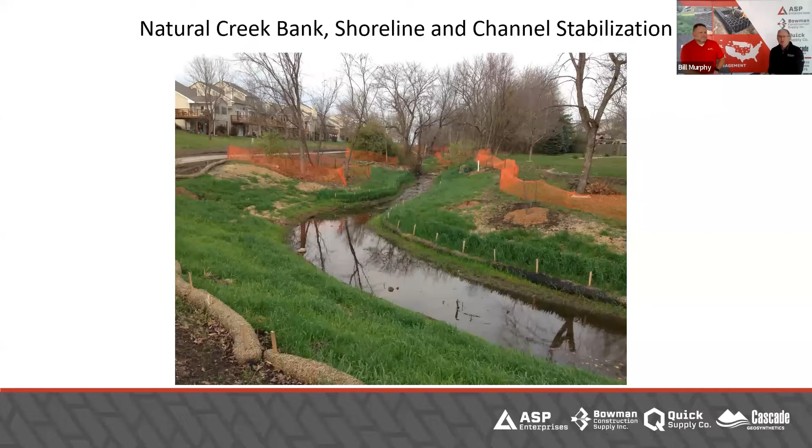So streambank stabilization, whatever you want to call it. It really runs the gamut, and many of you have probably dealt with some of this, but we're going to start at kind of the fundamental level, and that's biodegradable stuff, right? So here you see coir logs. This is a good example. We've got a temporary erosion blanket. Now, albeit it's a coconut blanket, so 3 years lifespan. It's got a coir log at it. We'll talk a little bit more about those, but that's 3 to 5 years.

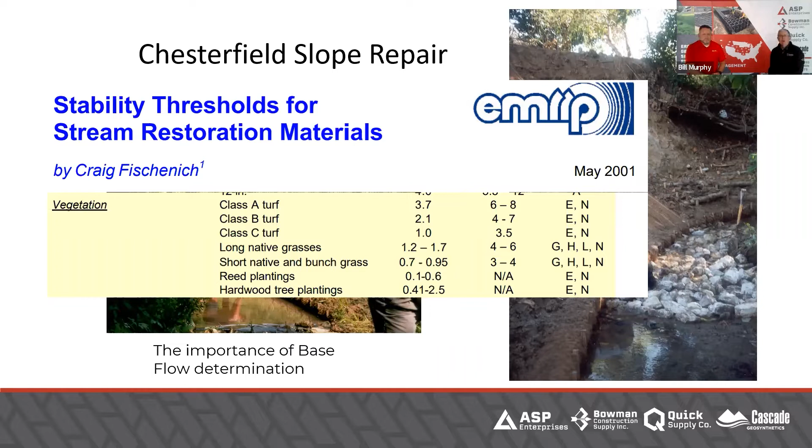But at the end of the deal, vegetation by itself is going to overtake the erosion control responsibility. And vegetation is what we're looking for, right? So we also need to understand vegetation has its limits. And so obviously turf is pretty strong. Those are shear stress and velocity ratings. And this is something that is continuing to evolve, especially with these deep root vegetation, what they're capable of. But we just have to understand that these are some of our limits for this type of creek bank where we're just trying to use coir logs.

And we can help you select that. Oh, absolutely. Yes. And that's what we're here for.

Even to the idea of contour wattling, you think of wattling, you think of straw, but we use contour wattling with coir logs because again, it's going to last way longer than the straw. It allows time for vegetation to have a spot to get vegetated within. It's going to do some stormwater management by slowing the water down, picking up sediment as it heads down to the creek, which is always a good thing. But again, it's just another example of coir logs and how they're applied.

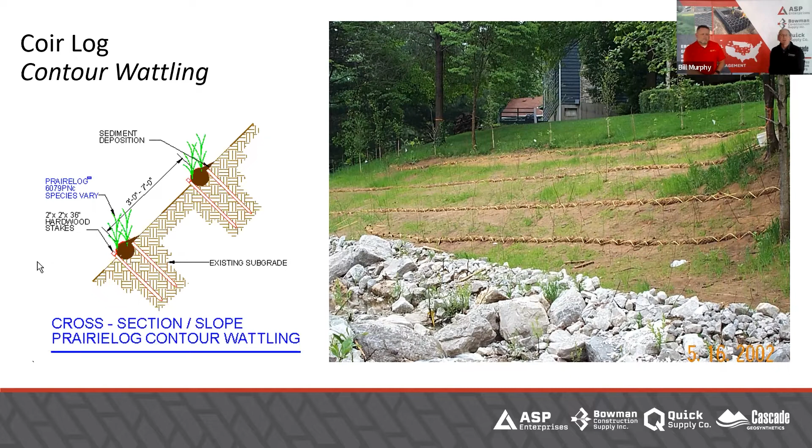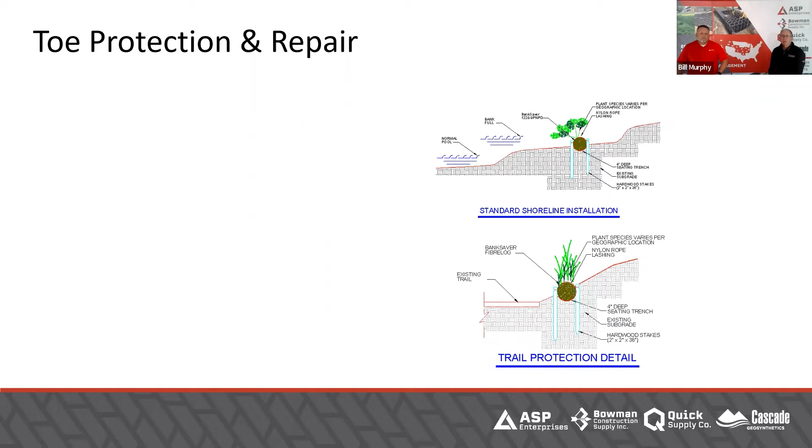Here's another one that's more common, for the toe, like you saw in the first picture, or in a bench. Again, the idea is giving it some vegetative support. And then typically this is an example. This is actually an old picture. Look at that, 2002. But the idea was this creek's coming down there and was eroding a lot of the underneath of these trees. And what this coir log will actually do is allow for sediment to build up behind it, and that sediment then helps that tree keep alive and healthy.

And so again, there's just a variety of ways you can use coir logs. And then this coir log itself is a growing medium, so plants will grow within it. And just like any other erosion control, you always want to think about the termination points, right? This termination point is at the end of it. And basically you just always want to turn the ends in, so if you have scour behind it, it doesn't undermine your solution.

And this is where I talked earlier on our practice run. This is a plan view looking down on top of the stream. Some people might look at that and think it's a profile where you're trying to key that in down below, but you're not. You're doing that with stone. The rock will be toed in.

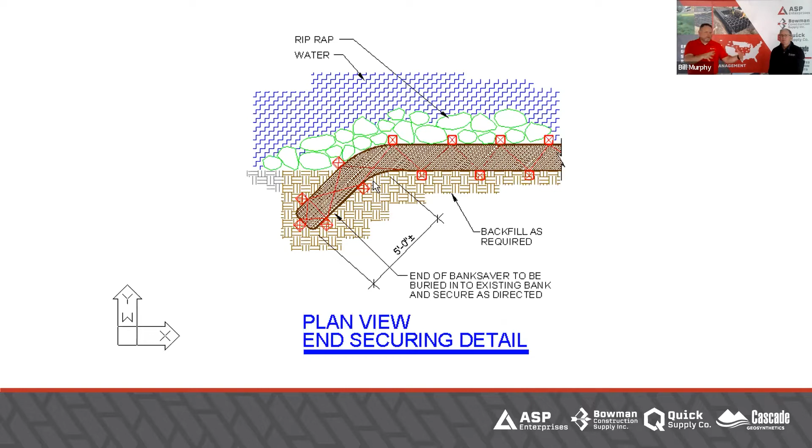So Biosol. Oh, I would love to talk about Biosol. That's one of our in-house. Can I have that? You can. Thanks. Or may I?

Rocky Mountain Bioproducts. Biosol is the nutrient source to establish vegetation. What Don was showing there earlier, and I just want to back up a step. What we're talking about today with streambank stabilization is some of the lighter, easier stuff, the lighter flows, easier channels, but we're going to progress all the way through to streambank and riverbank protection and how all these products work in harmony. So by the end, you'll hear us talk quite a bit about composite solutions.

For the vegetated solutions, we have to give that vegetation a chance. A lot of these projects have had a lot of soil disturbance. There's been a lot of grading activity. So you may not have good black dirt with organic material right at the top.

We've got to provide some nutrients. So in order to do that, we have Biosol and Biosol Forte, which are our long-term, we almost call them permanent nutrient sources to get that vegetation established.

Too many words on the screen. Years ago, Don and I said we're going to try to take text off the screen, but I left this slide in on purpose just to highlight that this is an organic fertilizer. This is plant-based. This is good for nature. This is not going to introduce any kind of leachates or pollutants or any contaminants into the water. This is all about water quality.

So establishing vegetation by promoting soil life or soil health, but also improving that water quality by not only having vegetation established, but making sure that we're not overdoing it with fertilizers. In the ag world, and I'm surrounded by corn and beans and livestock, often fertilizer is a dirty word. That's not what this is.

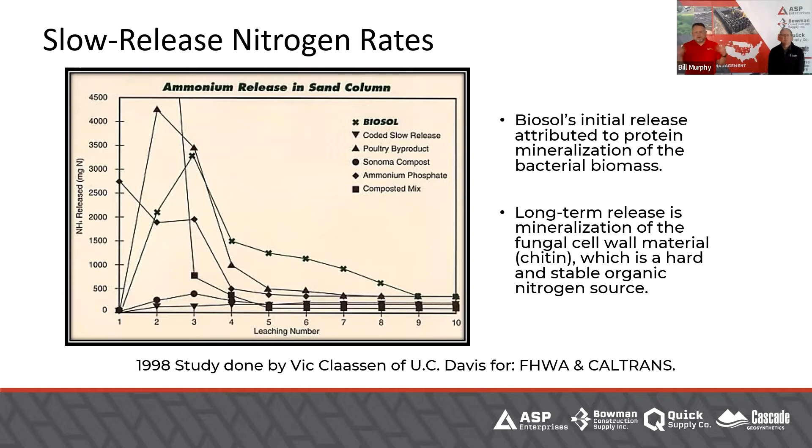This is one of two projects we'll show you here with before and afters. This is a 2-year difference. As you can see with the soil on the left, that's not really black organic material. That would have had a really hard time growing vegetation on its own. So to give it a boost, they added Biosol Forte, and you can see that that fed the soil, that feeds the plants, and you get not only the vegetation stand, but the water quality we've talked about.

This is a creek realignment project. Critical that that gets some vegetation, reinforced vegetation would be good on some of the steeper slopes, but you've got to make sure that for the larger storm events, the soil is protected.

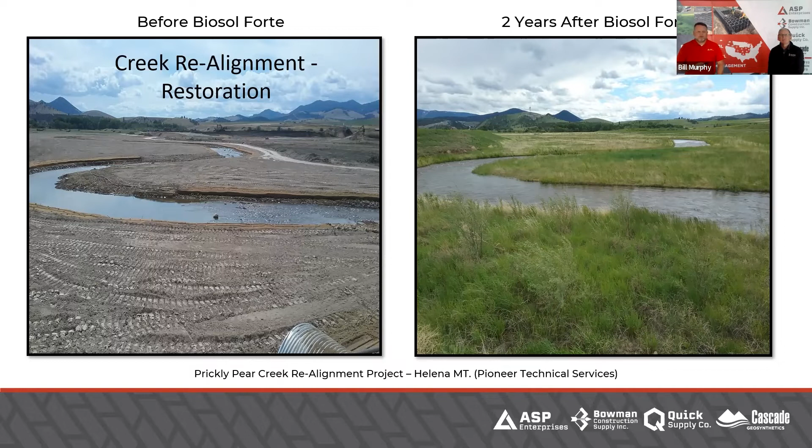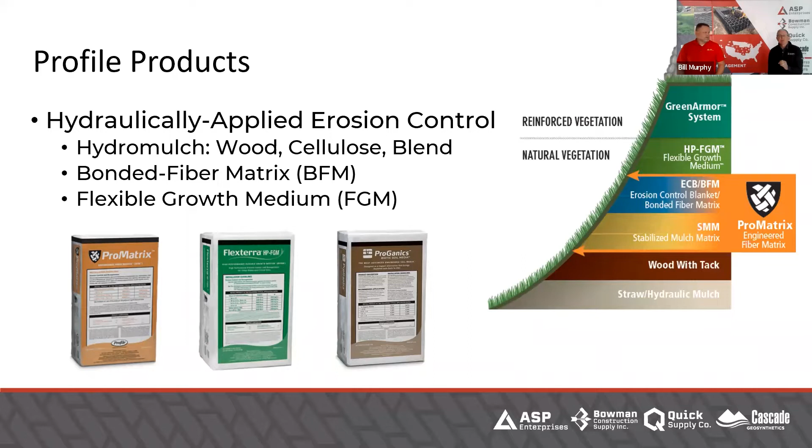And not only Biosol, which is a nutrient source, we talk about biotic soil amendments. Yeah, and so that's a whole other conversation, getting into Profile Products. We'll do that later. But ProGanics is just something that can benefit the soil structure because it's got organic matter, et cetera, but it still needs a nutrient source. That's the value of Biosol. And so ProGanics is a topsoil replacement. The biotic soil media is what they say, BSM. Yeah, right. And there it is.

So what it does, it helps build that revegetation platform. And it makes a more ideal growing environment. Again, it still needs a nutrient source. That's why you have Biosol. Yep. But it helps with that long-term vegetation. It holds all that material in place, basically. Which is huge for streambank stabilization. Yeah, it's got biochar, mycorrhiza, all kinds of stuff in it.

Yeah, I think I was going to keep talking about that. I don't know. I handed that over to you for this slide. Jumped the gun. That's okay.

So, again, we were talking about temporary stuff in the past, as far as the coconut blankets, the coir logs, et cetera. Now we're looking at turf reinforcement mats, having permanent root reinforcement or stem reinforcement that then has long-term implications for shear stress and water velocity.

This 3D image is awesome. This particular one is Green Armor. It's actually Enkamat, for the old folks who know what Enkamat is. It's a really open TRM, which is interesting because then a lot of the natives that might have a stiffer or a thicker stem coming out can get right through it. But then you basically glue it to the ground.

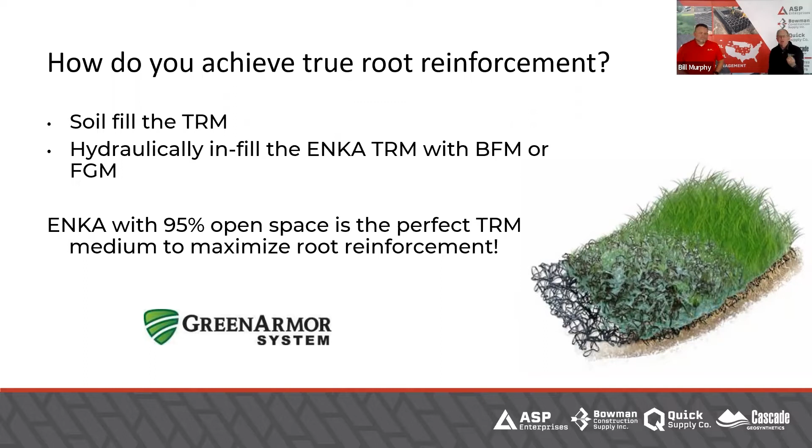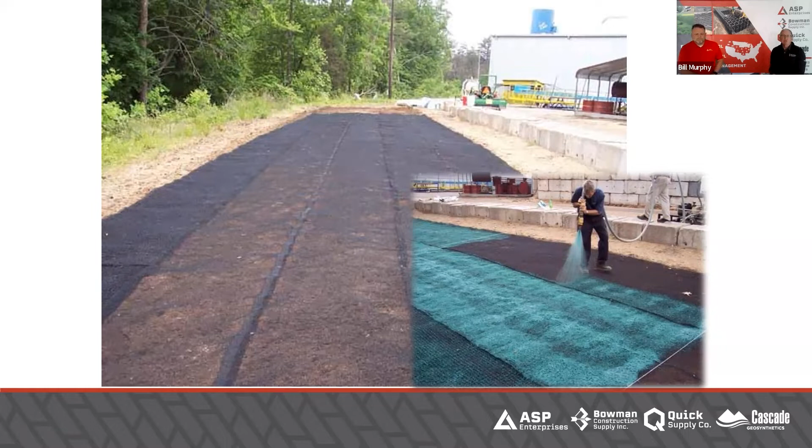It has staples in it, but you basically glue it to the ground with Flexterra. And you could even put ProGanics in before you did the Flexterra, which is hydraulically applied. Yeah, so it's hydraulically applied here, and you can imagine the strength of that when it's stapled to the ground and then glued to the ground.

And then what you need to know with Flexterra, which we're not going to get into today at all, but Flexterra is a great growing medium also, that it's going to allow for moisture to stay with that seed, and you'll get this kind of vegetation. Hugely popular. Oh yeah, big time. There you can see that root reinforcement.

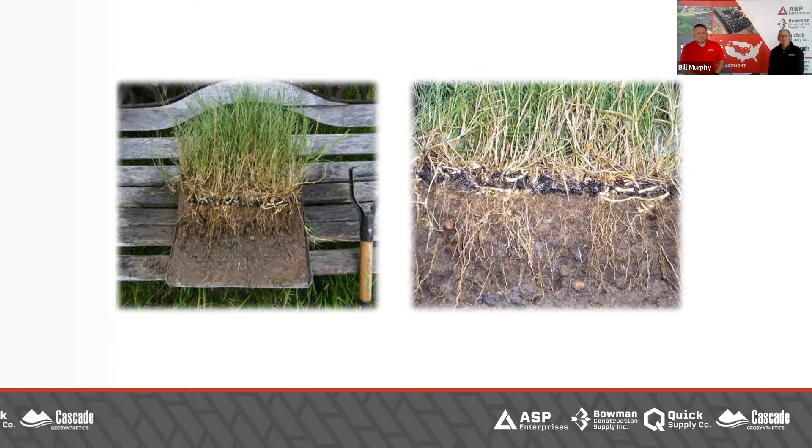You can imagine how much stronger that is in a hydraulic environment, because now you've got roots down deep that are going to do what you needed to do to hold that soil in place when you have a big stream event. And so go back to creek bank stabilization. Here you go. Beautiful.

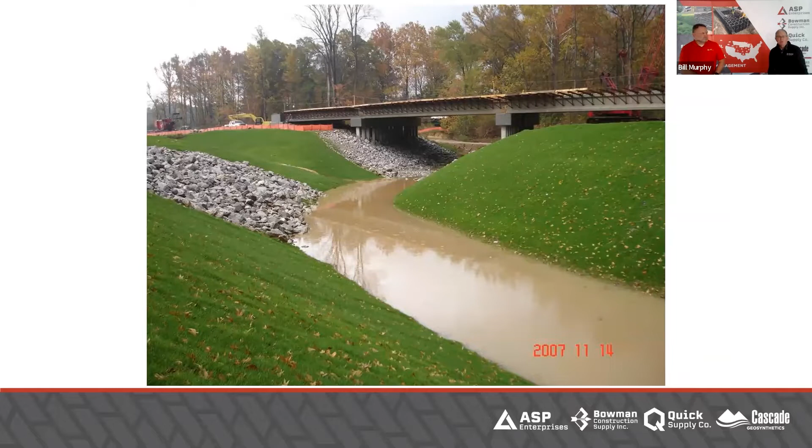Now here's an example. Having this on the bottom, this is still probably considered a drainage channel because we're going to grow grass in the bottom of this thing as well. But again, it's a great solution. When you look at the vegetation, they've got some rock in areas where they felt like they needed some more protection. But again, a very green solution that allows for sediment to be settled out of the water, filtered out of the water, et cetera. So that is one TRM.

And then we have North American Green that has the 3 TRMs we've talked about in the past. You got SC250, C350, P550. Yeah. We can also use those in a creek bank stabilization. Again, we're more concerned about plastics maybe, so we have to think about that. But it's still very effective to help get native plants in many cases established on a slope. And we'll show you some examples here.

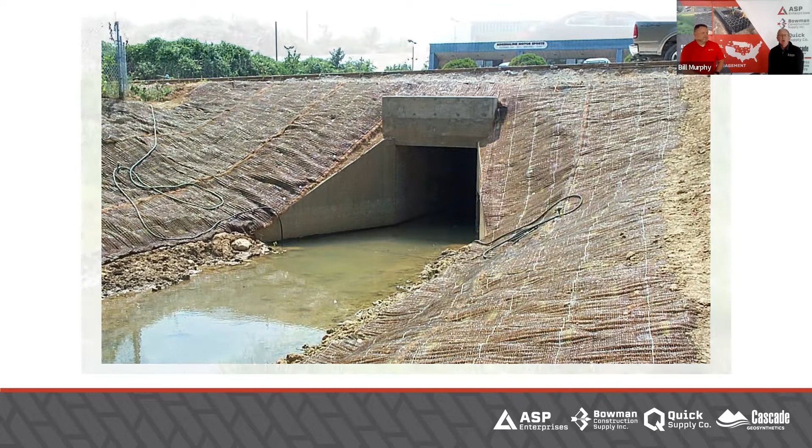This project was actually originally designed with riprap, and the contractor came to me and said, I can't get riprap to stay on this slope. Good. We decided to vegetate it. And so instead, again, this is kind of creek bank stabilization, but any of that scour that comes behind that culvert, we're protected with C350 in this particular case.

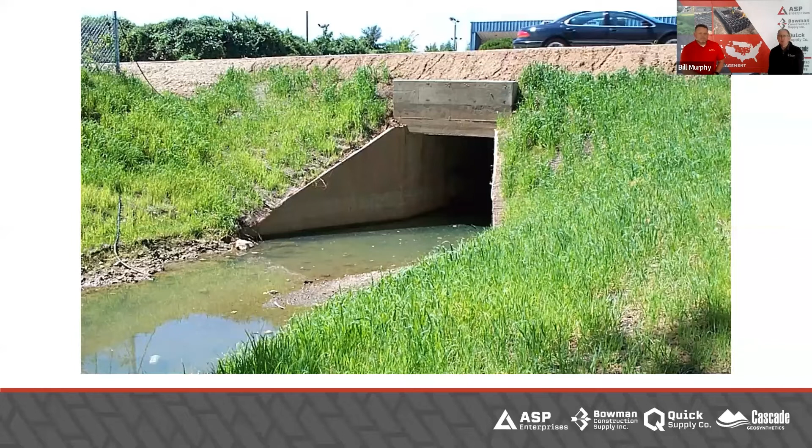Then once they got done with the C350, they transitioned to just an erosion blanket. So they got vegetation on the slope above it. And then in some cases, they even planted some sedge plants in it. Here you can see a further picture away. And now you can see a completed picture, there with the sedges. They actually planted those, cut it through the TRM. And then again, a very successful project.

How much nicer is this than having 6 feet wide of rock riprap that you're trying to walk on to get to the water's edge? No, thanks. Yeah, no, not at all.

Just a reminder that for these TRMs, especially North American Green's, these are the shear stress ratings, comparing them somewhat to riprap. You look and you say 30 inches of riprap is comparable to SC250. Even if you looked at 30 inches of riprap compared to P550, P550 is probably about half the cost of installing 30 inches of rock.

So there's some value in terms of the cost of it, but then also you got the vegetation advantages, all those other things. You can mow it if you want. You don't have to worry about debris catching in between the rocks. I mean, turf reinforcement mats offer a lot of benefits. Yes, big time, big time.

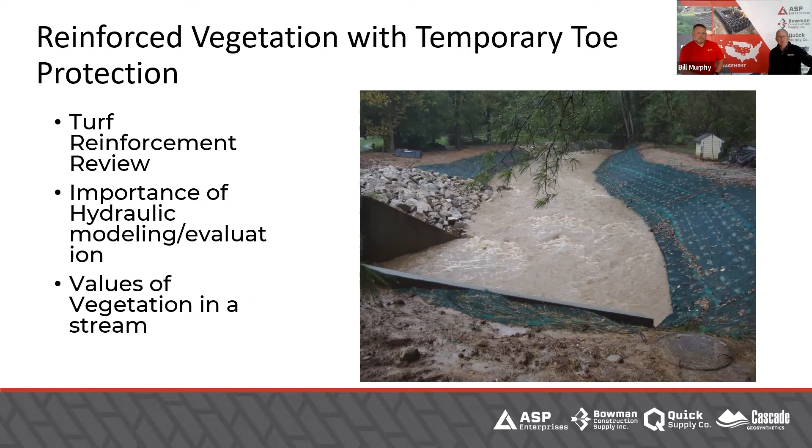Here's another creek bank stabilization. They put some rock on that downhill side where they were really concerned about scour. But again, you can see it's taken a pretty good volume of water. Looks like the day after they installed it almost. We've done a lot of this here.

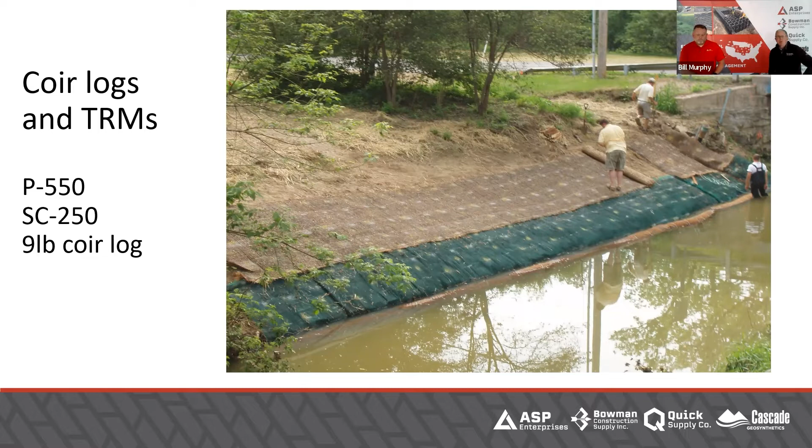This is actually a golf course, and it was in between 2 culverts. So we have a coir log down at the toe. You can barely see it. 1 layer of P550 where that shear stress is a little higher. And then up higher, we went to SC250.

Again, here gives kind of an after shot. Eventually, those coir logs will also completely vegetate just with natural seeds that come through, or you could actually live stake it, that kind of thing, if you want to do that up front.

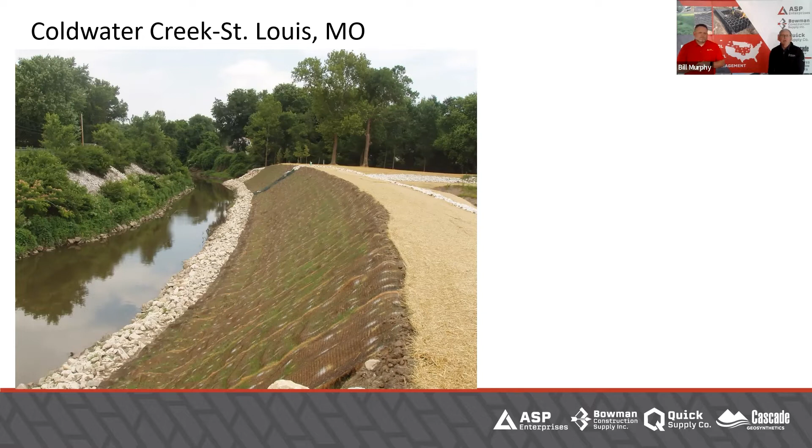This was an MSD project. Again, it was just a creek bank, C350. This is before they decided to use rock riprap for the toe. And here's the after. Again, good vegetation. That's going to be around for a very long time. The vegetation even protects the TRM from UV sensitivity, those kind of things.

It's a long-term solution. And then this is another one that was a nice channel project. They actually did both sides of the channel eventually. All native plants were planted in these. Did great. They probably could have picked a little different rock than just normal gravel. But again, a great project, great solution, because even the toes were protected.

And if the citizens go jogging by that or out walking around with their dogs, once that's fully vegetated, they don't even know it's reinforced. It's an all natural look. Yep. But you're providing the reinforcement it needs. Yeah, very good. Now this is a little different.

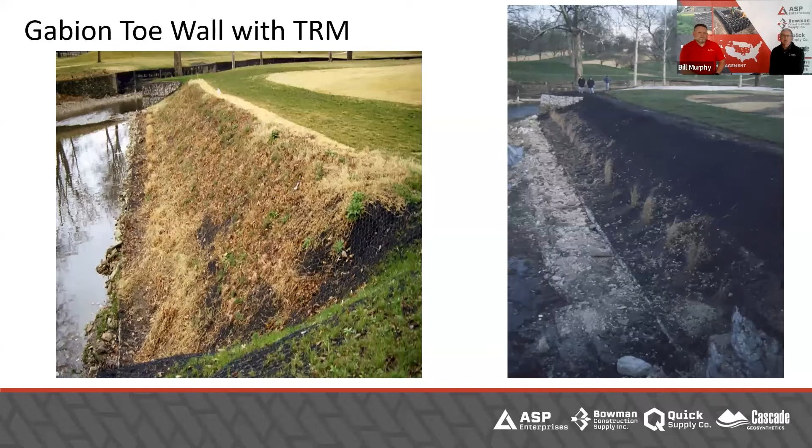And then here's another version of it, just looking from a distance. But again, another golf course. I believe this one was in Kansas City. But great project, and we started doing more of these with this Gabion toe, just to make sure the toe was established. And then we also talked a little bit in some of our stuff about bioengineering.

Bioengineering 20 years ago, we kind of said, well, it looks like it's twigs and sticks, which it is. And in many cases, that's been very successful. Conservation departments specifically have been very successful in taking willows that are dormant upstream and protecting a slope. The challenge, what we think we've come to, is that you need some structure even in bioengineering. Because if there's a $1 million building on the uphill side of that slope, we need to make sure there is no chance of failure. If it's a conservation area and they lose a little bit, they put it back together, no big deal.

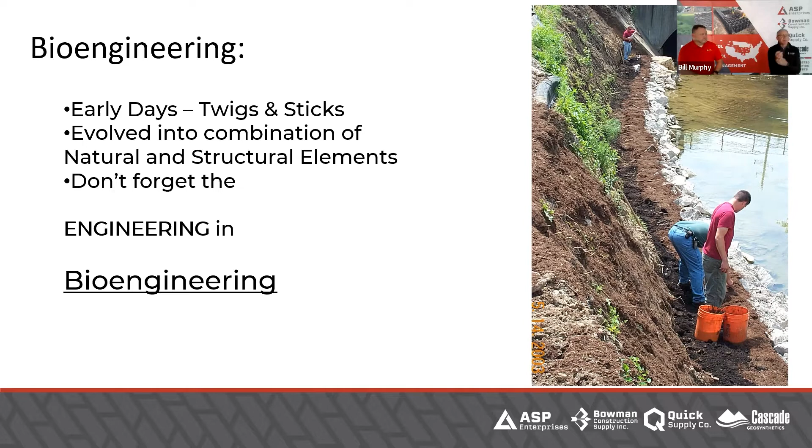So we're going to talk a little bit about bioengineering, but more about the structural elements. For example, here, this is the start of composite revetment, which we'll see some more of in a minute. Here's just some plain live staking. Again, we've got structure at the toe. We've got a good, strong TRM on the slope, and then they put a lot of live stakes in it. And I wish I had an after picture, because I've got to believe this thing is about 10 foot tall and you can't see anything. Again, it's going to be a very natural look, but very successful.

Here again is that composite revetment. Composite revetment has grid layers, basically like burrito wraps, that then have live stakes or bare roots in them to get that vegetation going. It also has some rock with it, but it is a structure, and it does then blend into the environment. So it ends up being a very environmental solution. I think we'll have a couple more images similar to that as we get into it later.

Yeah. What is that? And that's a live stake. So we have done a lot of live stakes over the years. We supply streambank projects with live stakes with bare roots. We can certainly give you recommendations on varieties that we've seen work well in the past. And again, it's just a great way to get something vegetated, and it can be fairly inexpensive because a live stake can be as cheap as $1. And in 2 years, it'll be a 4 foot tall plant. So a live stake can really be a good solution.

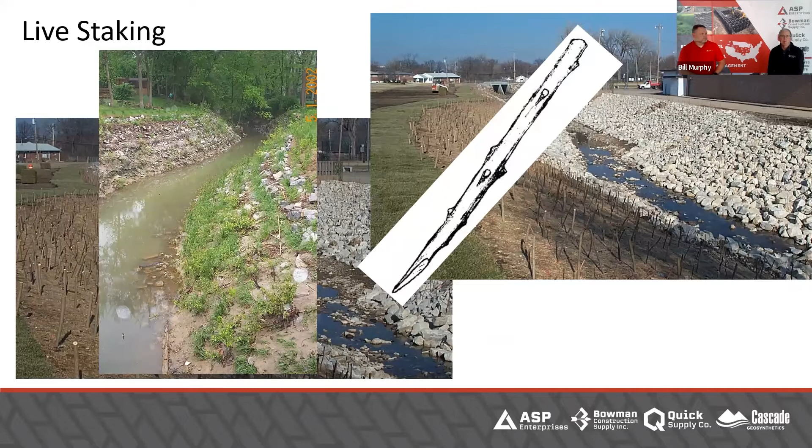So here's, yeah, I'll talk about it briefly. High performance turf reinforcement mats. Really what we're talking about is getting into some, and there's a question on there, I think, getting into some anchored systems to get into the higher velocities, higher shear stresses. We're going to keep getting stronger and protecting more critical areas as we go.

We have a number of products that are considered high performance turf reinforcement mats, and then a number of the DOTs, because we're talking about 12 states. I know you see a lot of Missouri projects on here. That's just the guys that sent us pictures of their projects and the ones that we've most recently talked about. But in all of our locations, the DOTs have their own categories for turf reinforcement mats. We can help you make the right selections for those.

Here's one example. We'll spend more time on this later. This happens to be ProPEX's Armor Max product. It's a really awesome solution that's anchored down and can take a lot higher velocities and shear stresses than most. And we have a full case study on this that's available on our website. And then we also have some of these imprinted literature, where you actually have handouts at some of our conferences like the IECA events, where we can have those available for your reading.

If you guys have a project where you're considering some different solutions and you want our help, that's one of the ways that we can help you convince stakeholders, is with a lot of our successful projects we've had in the past, help tell the story.

I'll go back. Well, no, go ahead. The question was about Biosol and its shelf life. As long as it stays dry, the shelf life is much longer than the year that you're talking about, because they bought it in the spring of '22. Can they use it in the spring of '23? Absolutely. It's basically until it hits the soil and those biotics start to go after it. It's basically not activated. There's no activation. So good question. Thanks for asking.

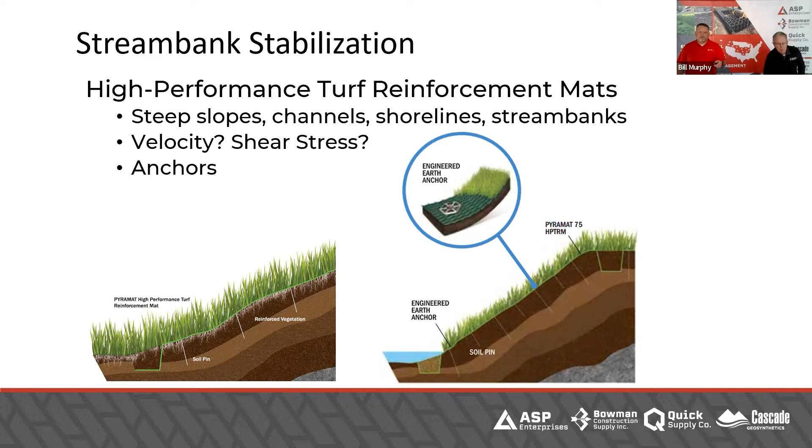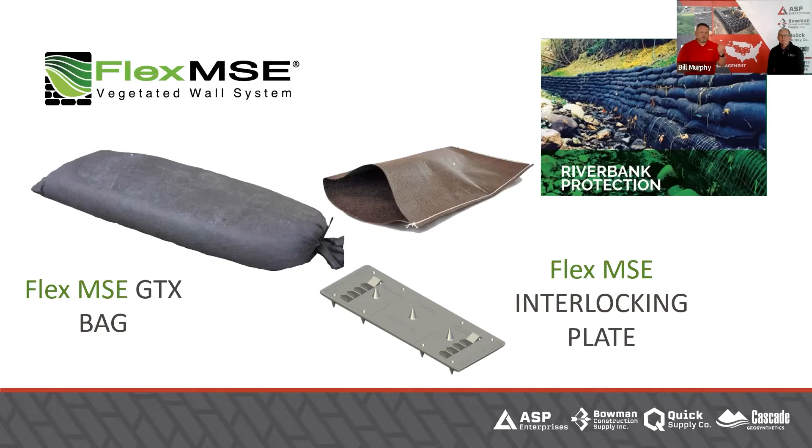We went past the HPTRM, spent a little bit of time. We'll get more into those later. But as we start to talk about structural solutions, we got to talk about our vegetated wall system from Flex MSE. These bags are filled with on-site material. These are non-woven geosynthetic. They can be filled on-site, or they can be filled off-site and trucked to the site, depending on what works best for you. These don't have to be installed with heavy equipment. We have one right out in front of this building that I built with some of our members from our warehouse by hand, really easy to assemble. Every bag, every plate, they all interlock together, and it makes quite a strong system, as you see in that upper right-hand side.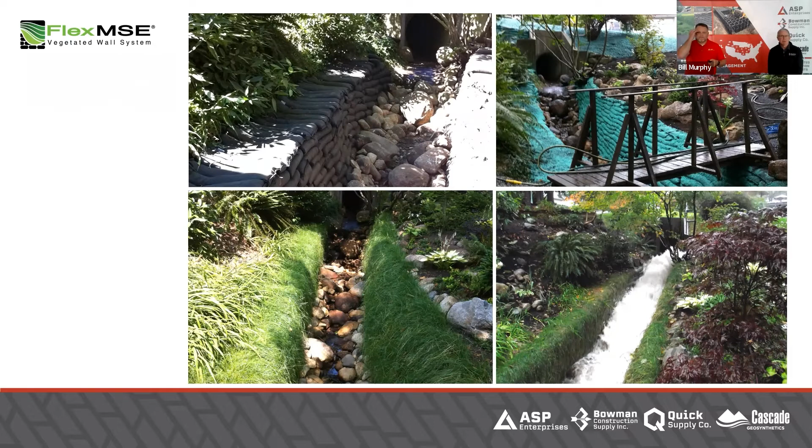And here's another example of that. They use natives here. And on this particular example, I think they cut into the bags and plugged into the bags themselves. They also have examples of layering the live stakes or the bare root seedlings back into the wall. FlexMSE has really good design software on their website.

You can access that through our ASP website, Quick Supply, Bowman, Cascade Geo, and there's a design tool in there, but they love to help. So there's a guy named Joel Kennedy who wants to come down and do lunch and learns with us. The owner Mike Calwert, they would love to do lunch and learn. So contact us if you want to learn more about FlexMSE.

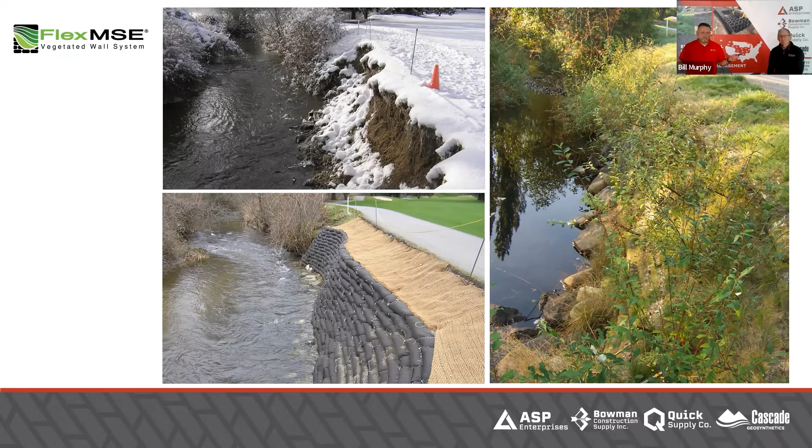Here's another project. Can it survive cold weather? Yeah. The original product was made in Canada. So they've got a ton of projects up north of the border in Canada and all throughout the US. And they're really popular in the UK and Australia. They're all over the world. They can handle all kinds of climates. And the whole goal here is to have a vegetated solution, as you see in the picture on the right, it looks all natural. Now, not all of our projects are going to be vegetated. We'll talk on that a little bit later too, with some of the solutions we have.

But people often ask if FlexMSE can handle really extreme wave action on lakeshore protection or in streams. It's not just the bags themselves that are there. They are tied back into the slope with GeoGrid, just as any MSE wall is. And those could be every 2 bags or every 3rd row and tied back with that GeoGrid, and they're all interlocked with the plates, which is patented. There's a hook that actually holds that plate from going out away from the GeoGrid, but it also ties hard to the GeoGrid to keep it up against the slope and makes all the bags interlock together. Once fully vegetated, you hardly know it's there.

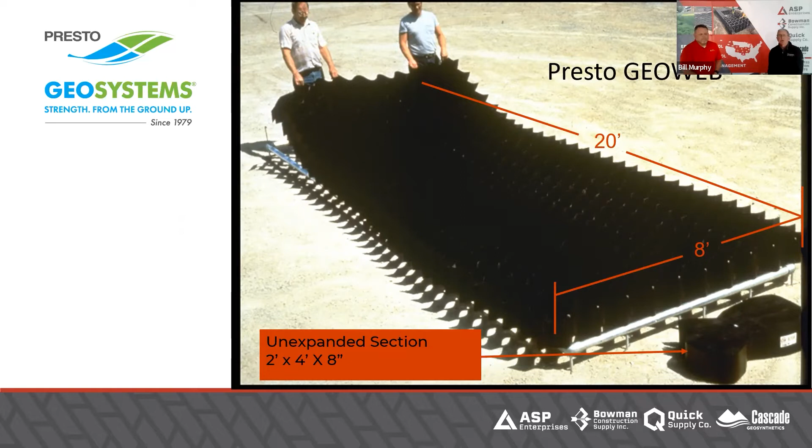GeoWeb. So you've heard GeoWeb maybe in the past. This does work for creek bank stabilization as well. It's HDPE panels that are welded together like you see here. And basically it's a way to put on a slope, protect the slope. A couple things, especially if you need to add some topsoil to it. One of the terrible things with a slope, how do you add topsoil and expect it to stay there, right? Yeah. GeoWeb's a great thing for that. Cellular confinement. Cellular confinement is important with rock because then we can maybe even use a smaller rock size, but it has more velocity strength because it's confined. And that's really one of the values here of GeoWeb.

In this, you can see here, now here they're actually putting soil on it. And they're probably going to put some kind of a TRM on, or some kind of blanket at least on top of it. But cellular confined topsoil is better than just topsoil by itself because it's just not going to flow down. That's a massive slope. And what was holding that together? What were those orange lines? Oh, they also have tendons in here. So those tendons, there's an ATRA clip that can go to that tendon, hold that whole GeoWeb down. It's just a good system.

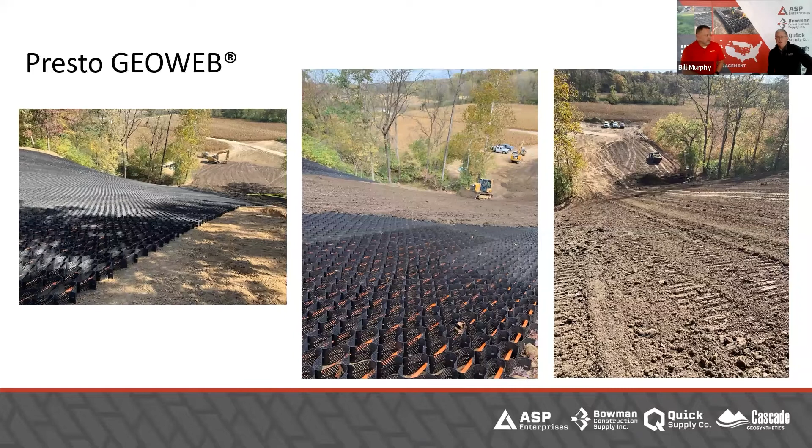And again, they're talking about websites. They have another one that they can do a project setup for you, give you recommendations, all those kinds of things. And they want to do lunch and learns, whether it be virtual or in person. Yep. Yeah, Presto's ready to help.

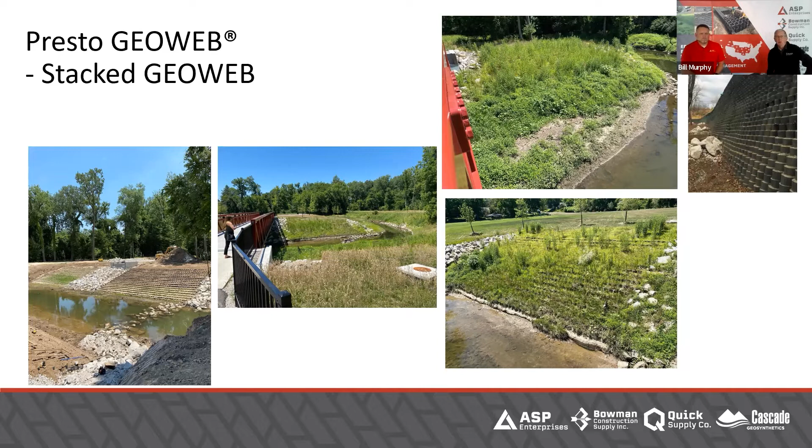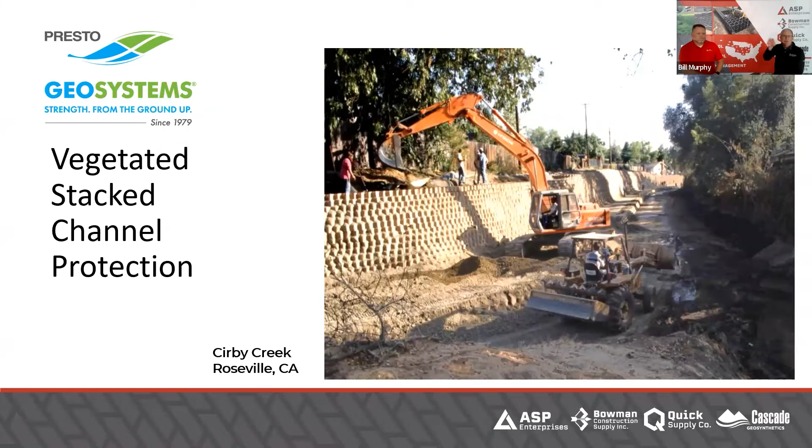Even if you wanted to, you could probably even spray with Flexterra. Here's again another example of that. Every one of those little pockets you see is a way to get something to grow in them. Here's another example where it can even do two-tiered and move one off to the side because again it's flexible. Typically we're using 3 or 4 cell panels wide, so that's kind of your tier, your tie back. But we also use GeoGrid to hold them back when we get really tall. More of an MSE wall. Yeah, yep. But again, look at the vegetation. That's awesome.

And then the last one in GeoWeb is they also have a system, and it's on their website, that you can use GeoWeb, and once you have the GeoWeb installed, then you fill it with soil. You can actually put a TRM on top of it. Now it's stronger than either the GeoWeb by itself or the TRM by itself. It's a great solution because now each of these pockets are basically little 1 square foot pockets of soil that can't go anywhere.

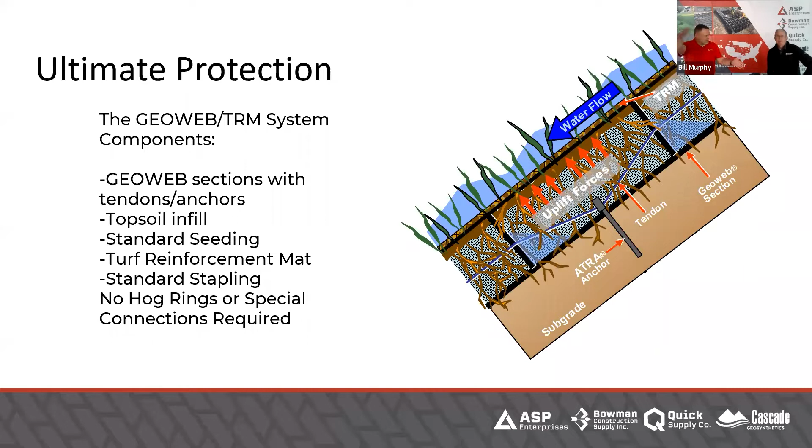Yeah, and that previous slide shows that ATRA anchor. This is part of the system that can be connected to the tendons. And then the ATRA key holds the cells open on each unit. It's awesome.

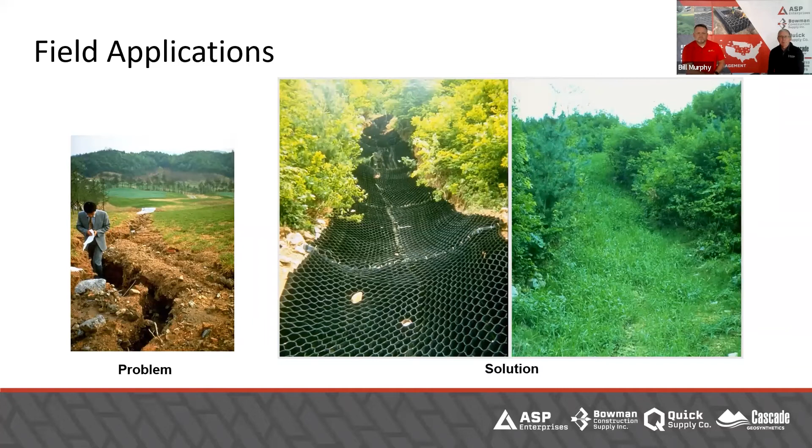Here, this was kind of a cool project. It wasn't really a creek bank. It was a very steep slope, and they weren't worried about it because they put a TRM on top of it. Look at that, fully vegetated. That's awesome. And then here's another ditch. So again, Presto does a great job of helping you with projects and getting you design materials. A lot of design support.

So transition mats, that's a category we created years ago through ASTM, and it's really grown in popularity. It's something between the turf reinforcement mats and some of the heavier structural reinforcement that we'll get into a little bit later. North American Green ShoreMax is one of the original transition mats. It's a rubber mat, so it's flexible, easily conforms to the surface. It can be anchored with staples, rebar, earth anchors. And the whole goal with this is trying to get vegetation to grow through it so you don't even see it.

And then we also have InstaTurf, which is ShearForce 10 and ShearForce 12 from our friend Tim Lancaster. ShearForce 10 is a rolled product, looks like AstroTurf, the artificial turf, but it allows vegetation to grow up through it. So you get the full vegetated protection eventually, but you get immediate protection day one, immediately green with that ShearForce 10.

ShearForce 12 is the panelized version. It sits on top of a rubber mat, similar to ShoreMax. And that gives you a little beefier transition at scour holes like outlets of culverts and some of the trickier transition areas. There's some hybrid solutions where Tim will recommend ShearForce 12 on the bottom and the toe and graduate up to the ShearForce 10. And from that, you can get into the turf reinforcement mats and erosion control blankets.

But all this stuff has been tested as well. All the InstaTurf stuff has been tested, and I think it was TRI. So they have shear stress ratings and velocity ratings.

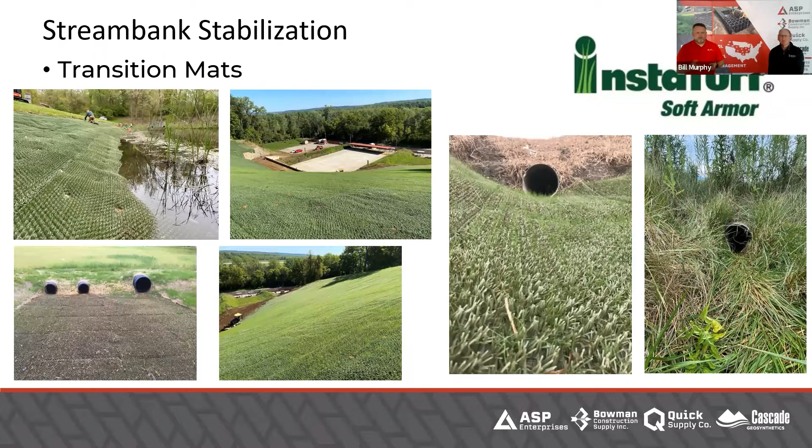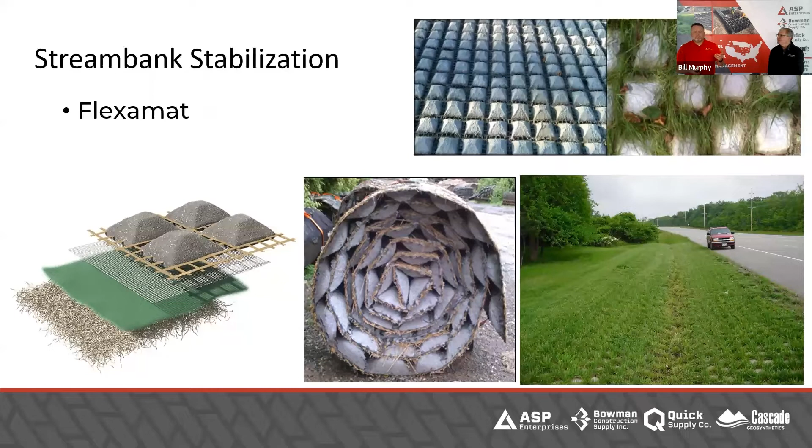It comes in various roll widths and lengths, and all of our sales team are really comfortable talking about Flexamat and working with it. We can help you really quickly turn around a project design with support details from Flexamat themselves.

This one, Don gave me a reminder earlier to mention anchors, and I can't see it on this screen because our picture's up there. Oh. I added plus anchors. I just did it to where we can't see it. Okay, good.

They have the cross plate. Yeah, cross T. This one's pretty steep, so they wanted to make sure that this Flexamat stayed in place. So they actually anchored, it looks like, every 3 or 4 feet. Yeah, they'll use those compression earth anchors. And rather than use a round disc at the top of that, they use a metal cross that goes in between the Flexamat patties, fits right in the grid, basically disappears, but it really holds that into place. And we've got a variety of anchors available in different anchor lengths, whatever you need for your site.

And this particular one, you're getting some side slopes vegetated. On the bottom, if it doesn't vegetate, don't worry about it. If there's sediment deposits on that, it actually starts to look like a natural stream bank over time. But if there's ever a major storm event that's going to take that sediment away, it's not going to remove the Flexamat. It's going to stay in place, particularly if on the leading edge you get that keyed in like they recommend. The manufacturer has really good details on that. Yeah. And we do pre-construction meetings to make sure the contractor knows how to install it.

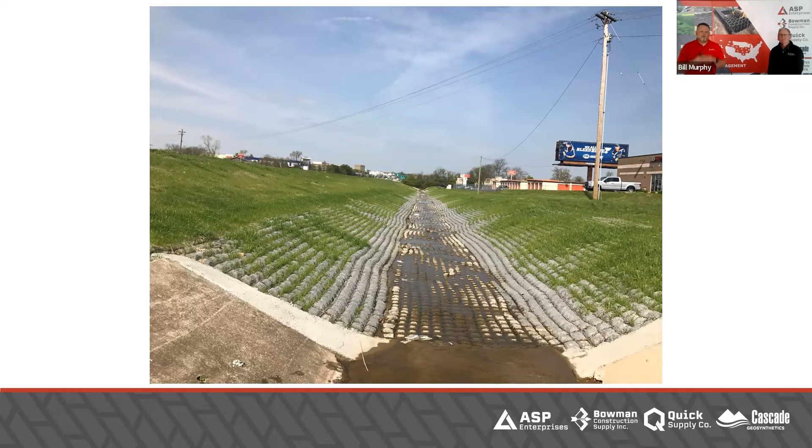In this example, they've grout filled that trench at a transition from concrete to Flexamat. And just over time, it's a good looking channel. Good looking channel. And that's it, fully grown. It's awesome. You can't tell, but that's very well reinforced. It's not going anywhere. That's right.

So going back to, we talked about burrito wraps a little bit. We've done a lot of that in our bioengineering world. The one in the middle there is literally just BX 1100 geogrid with a coconut mat and then wrapping a burrito of soil. And then once they got that all done, they stuck live stakes in it. I have actually seen this site after this picture, and it vegetated very well. Again, willow stakes just grow like crazy. Willow stakes, buttonbush, there's a few others. But that can be a simple way. Now it's much more natural, right? There's not any fine lines to it.

Some people like the one on the left. It's more distinct, and that's just using some forms to create that structure that you see while you're building a reinforced slope. And same with on the right. And there's a variety of ways to do this. Some like to use the wire face, like the wire face here. This just got rock in it. That was actually a road closure because of a channel below it. Or the one on the right is just a steep slope. It looks like there's a pond in front of it.

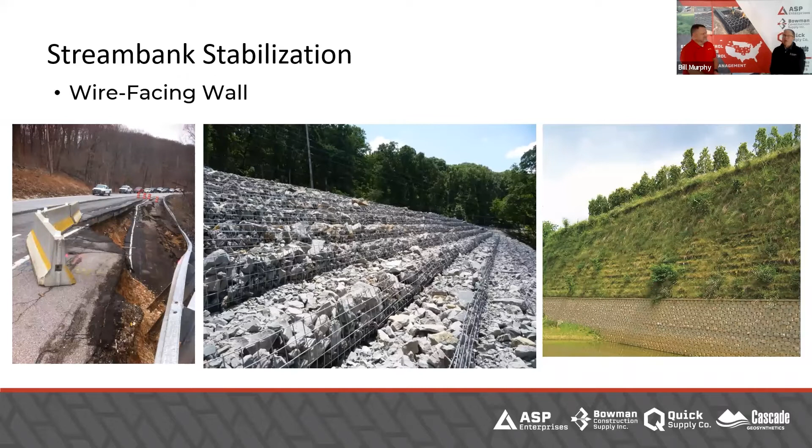But again, especially like you see on the one on the right, you don't have the expense of the concrete block. Really all you have to do is some simple protection on the face of it and then vegetate it. So those are some good options again. To transition from that, now this is hard armor, and this is something a lot of people haven't talked about. Gabions aren't getting used like they used to. Still something that I've recommended because for some specific reasons, there's really not a whole lot that does better. And I'll explain that here in a minute.

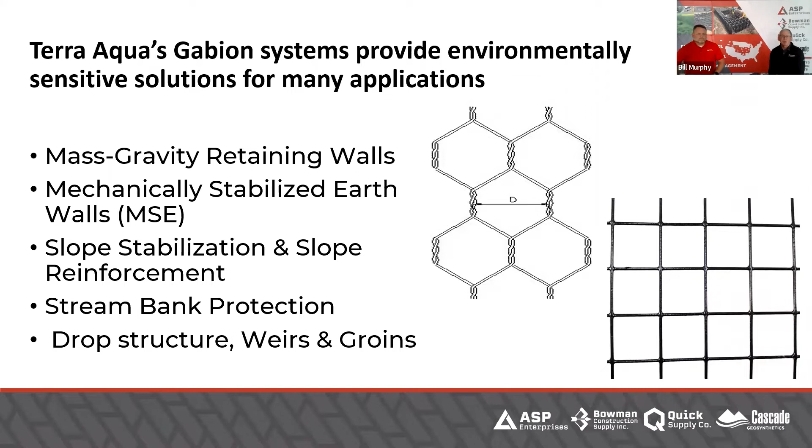There's two different kinds. There's a twisted wire mesh. That's one of my favorites because even if you break a wire, the thing doesn't fall apart. If you lose one or two of the welds on a welded wire, potentially you're going to have some issues. But as you can see here, we can do mechanically stabilized earth, gravity walls, all that kind of stuff with Gabion mesh. And we're going to talk a little bit more about those.

Really important that you think about the sizes. There are standard sizes. It's important to use these sizes as much as possible because this keeps it cost effective. If you tell me you want a 2-foot Gabion, we can probably do that, but you're probably going to pay the same amount as a 3-foot Gabion.

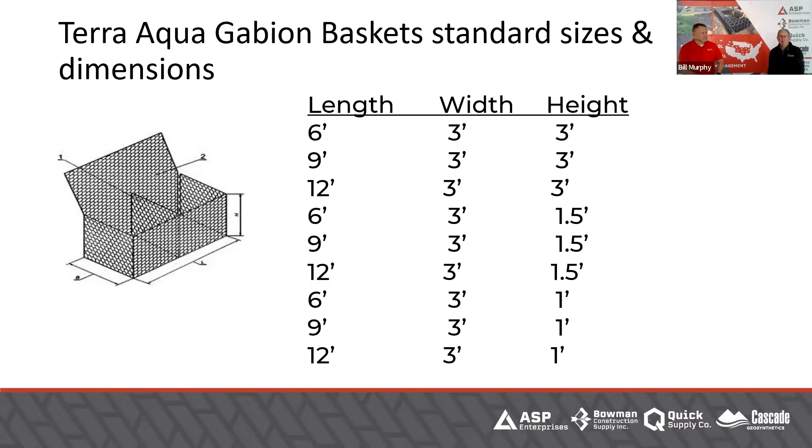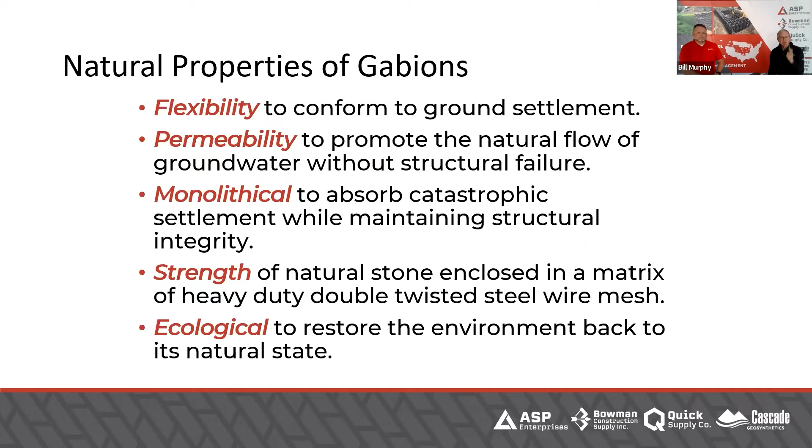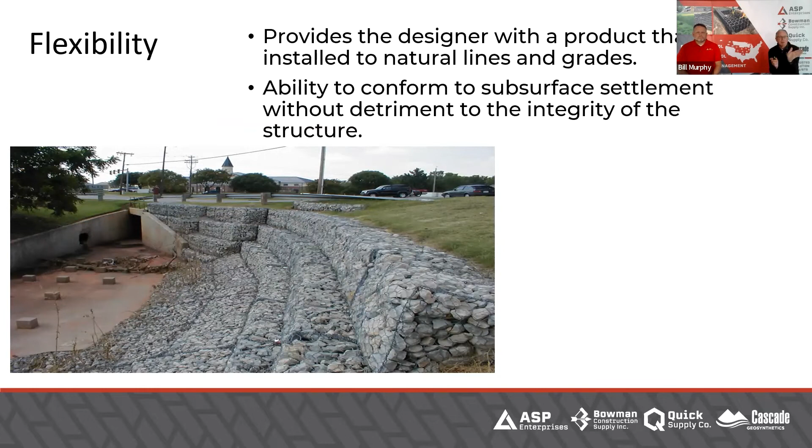Why are Gabions even worth talking about? Because of these 5 things. They're flexible, they're permeable, they're a monolithic structure, they're strong, and they have an ecological advantage, and we'll explain that. First, the flexibility. Like that earlier picture, you can do the natural lines, and you can put angles to them, whatever you want to do with Gabions, because it's very flexible before you put rock in it.

The other big one is even if you have some subsurface settlement or some differential settlement, more than likely this slope is not going to fail. It's just maybe not going to look as pretty as you wanted it to, but it has great flexibility, can blend and move as the ground moves.

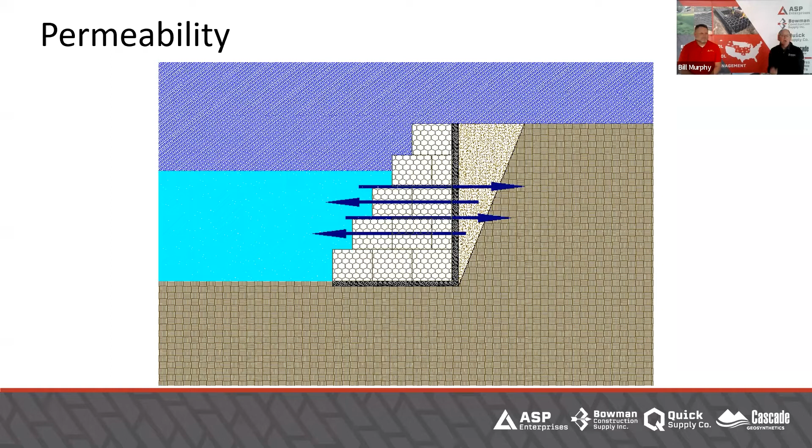Permeability is critical. How many walls have you seen that failed because of a water issue? Hydrostatic pressure. Water can come up and down in a creek. Water can go both ways. It's going to have a fabric behind it, so we have something that keeps the soils over on the right side from getting into the Gabion. But that way we don't have hydrostatic pressure exactly. So permeability is very important.

Monolithic, again, because I explained that every Gabion is attached to the one next to it, attached to the one behind it, attached to the one in front of it. It becomes one giant Gabion. So that's the strength. That, and then also there's the strength of the rock that makes Gabions very strong. Rock is natural to a certain extent, obviously, and it just is a very strong solution.

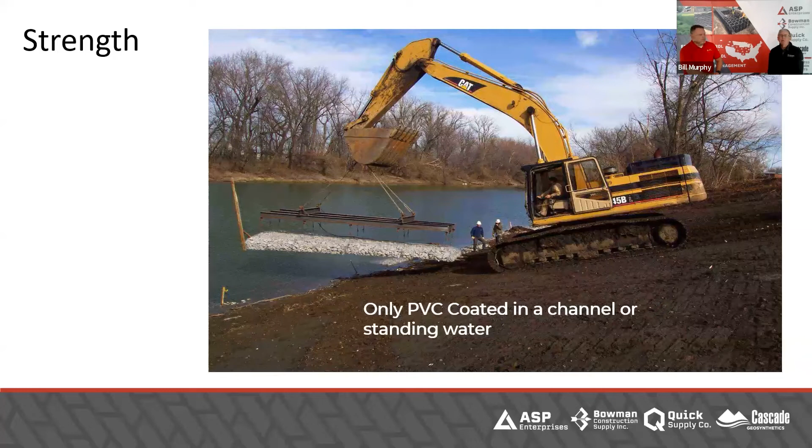Again, I said this earlier, got to do PVC coated Gabions. There's testing that was done, and if you do a galvanized Gabion in a creek, it might only last 3 to 5 years. PVC coated accelerated aging test, I think, puts it out to 75 years or something like that. So PVC coated is critically important to the success of a Gabion.

This was up in Milwaukee, where they actually had some kind of fish that was important to this creek. So they wanted it vegetated, because vegetation does a couple things. It keeps the water from getting too hot because it can shade the water, but also provides habitat, which is important.

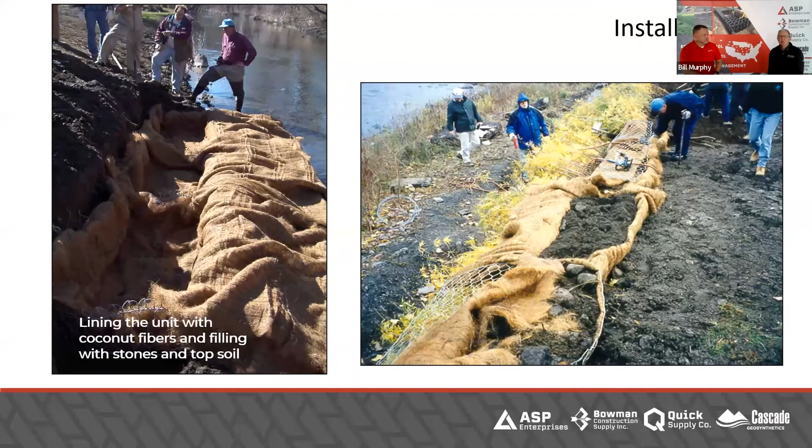Installation, again, we can do a couple things with Gabions here. This was kind of a pilot project where they did dirt and soil. There's probably too much dirt here. The one that really worked out well was this one. Here they realized that if they have a 4 to 8-inch stone, which is standard for Gabions, there's probably about a 30% void space. So let's do 70% rock, 30% soil, and then that still has the same weight, because again, it's mostly a ballast. And this gave us good weight, but allowed soil to then have something to grow.

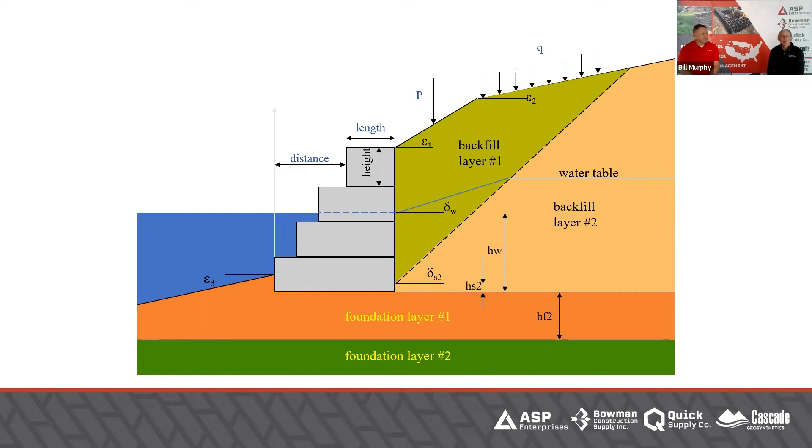There is a lot to a design. You can't just say, oh, let's put Gabions. You have to look at the different soil layers on the backfill, the steepness, the foundation layers, so you have bearing capacity. All those things play into the thicknesses of each row of Gabions and what it's going to look like. And that seasonal high water table is where the permeability is important too, to make sure you have some way to drain out the water behind it. Absolutely. And there are design programs that we can assist you with or get copies of for you to do yourself, so that you can then get a structural stability or global stability.

All of those things are easy for you to say. I know it is easy. But it's no different than any other wall, right? They're looking at overall failure. They're looking at foundation capacity, sliding, overturning, and internal failure. Most of the gabion softwares will make sure what your safety factor is for each of those conditions.

And what we talked about earlier is we're not competing with engineers. We're not taking their place. With that previous slide that shows equations, we work in harmony with project engineers, and we can even put them in touch with geotechs and make sure everybody's on the same page. We're not doing the design and stamping the plans. Absolutely not. We can give you recommendations.

Yeah. For sure. And one of the other things I think most people don't realize when they see a gabion wall, this is typically what it looks like. The base is going to be much wider than the top. And that just makes sense structurally, for stability. You want to have strength. And that's how the software will design it.

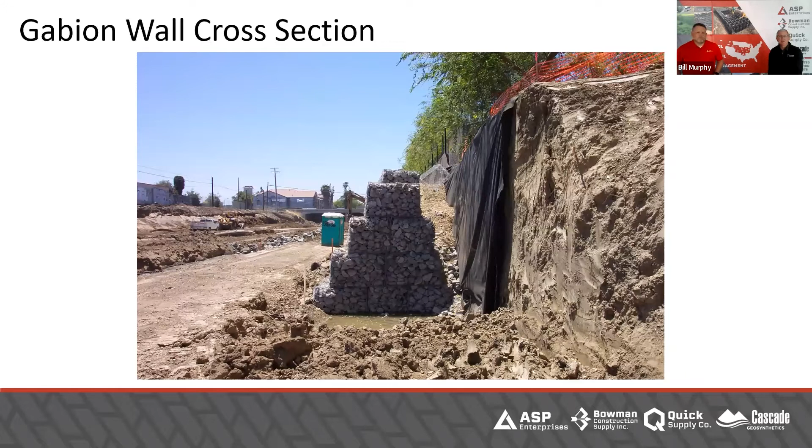And then one last thing is specifically to stream banks. This scour apron is really a good solution as opposed to burying an entire gabion. There was a job years ago where they actually were chipping out bedrock to put a gabion. Yeah, it was kind of crazy because I think that bedrock probably took care of it. But here, that's an alternative. You can do the scour protection.

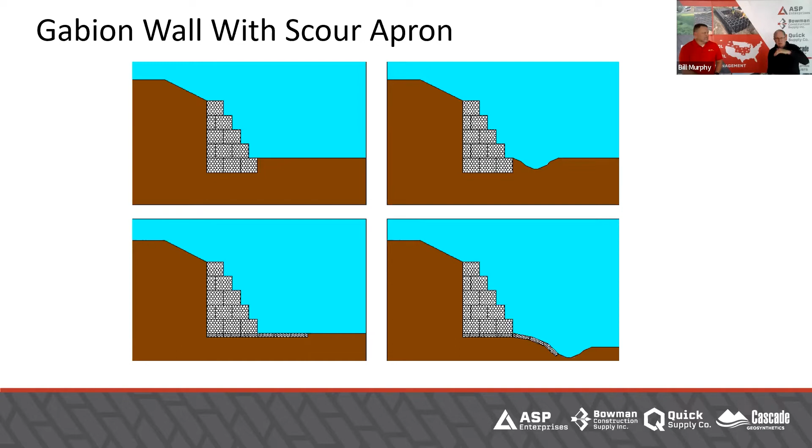And lastly, as far as gabions, we can do MSE wall designs. This is actually utilizing the gabion mesh as the reinforcement, the bottom of the gabion, the front and the top. So that's all one piece. Then it's filled with rock and then backfilled with whatever you designed the structural infill for. But it can be a less expensive solution.

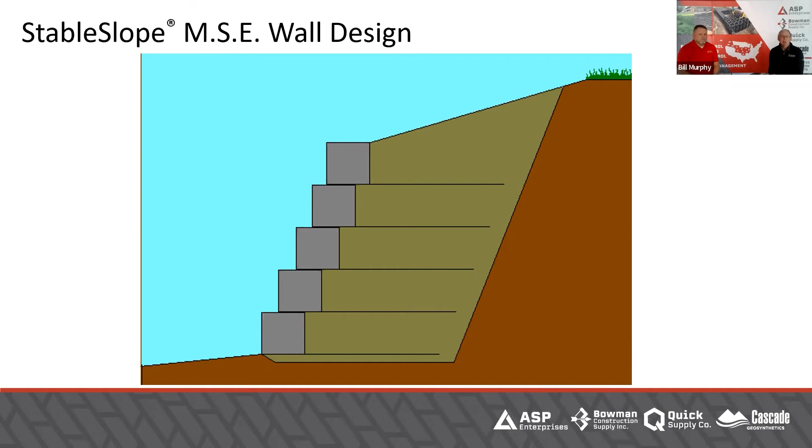In this day and age of labor being so expensive, now you're only filling one gabion and not all the gabions underneath of it. Usually you've got to be about a 12-foot high wall, maybe with labor costs being higher, maybe it's 9 now, I don't know. But again, a great solution. These are readily available as well.

So this whole thing's been about streambank stabilization. And as you can tell, as we go through this progression, sometimes it seems like we skip ahead or we go back. It's because a lot of these solutions work in harmony together. For every application, you might need a little bit of one and a lot of the other, or vice versa, or none of one and all of the other. So we're trying to touch on all of them in just 1 hour.

I see it's 1:11 Central. We're doing great on time.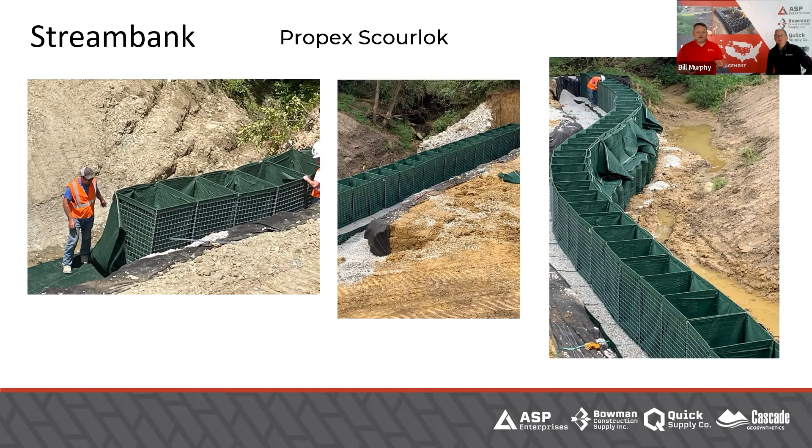This is the installation and the assembly before they filled them. There's two different projects here. The one on the left, you can see they're filling with on-site material. The one in the center, they're filling with aggregate, and that's going to be project specific. It's what you have available. It's what your needs are on site. It's what you can do to make it fit the natural site. You're probably exactly right. I bet it's more about availability. Yep.

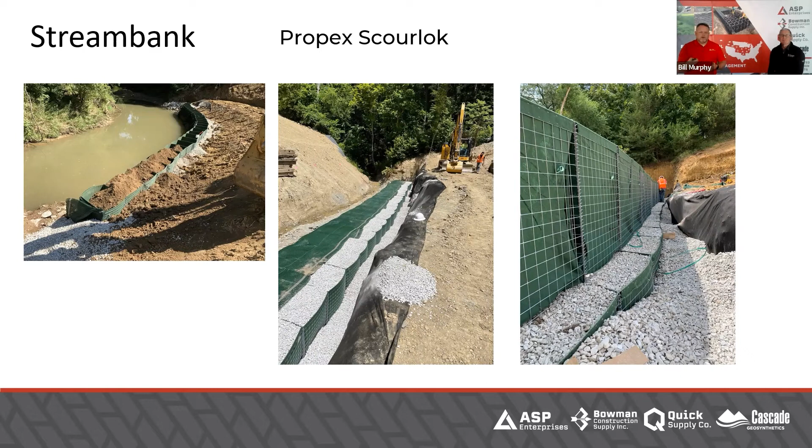And what we really like about this system is it's trying to fit, and Don mentioned this with the gabions, trying to match the natural stream alignment, or if you're realigning a creek, to try to satisfy the designer's contours and curves. A lot of thought goes into that design. As this system gets filled and continues to stack up, everything Don just said about the previous slide still holds true. This particular case has not only the stream bank protection down at the toe of the slope, but a massive slope up above it. You can hardly tell, but in that left picture, you see how high they are versus the trucks that are on scene. This is all part of stream bank stabilization.

It's got to start at the toe. You've really got to protect that channel section at the bottom, but you got to work your way all the way up the slope. You're not going to line gabions all the way up to the top of a slope like this, or even Scourlok. So in this case, they use Scourlok at the bottom. They ran up the slope with Propex ArmorMax that I introduced a little bit earlier. And the anchoring is critical.

Let Propex and their engineers, my buddy Ben Campbell, all of them love doing lunch and learns. They love helping design projects. Let them help us help you with the recommendations of anchor spacing, types of anchors to use. This can go everywhere from staples all the way up to the earth anchors. Great project. Oh, and the earth anchors with Pyramat, this ArmorMax solution is so awesome.

Now, once this is installed on that steep slope, on the top left, there's a tan piece of equipment. Can you tell what they're getting ready to do there? Well, I know this project. Yeah. First, they were putting on ProGanics and seed, then they put FlexTerra on top of it. That's awesome. Good job, Don. You get a star for the day.

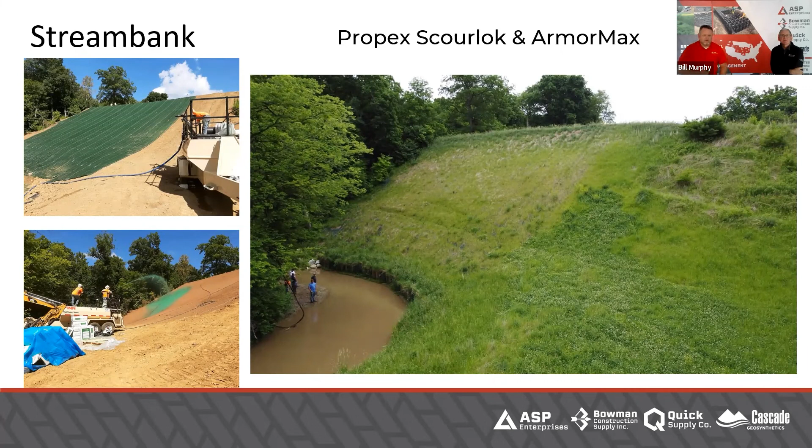The bottom left, you can see they're starting to shoot right on top of that slope. Yeah. So that had been soil covered, and they had the ProGanics on top. Yep. So that's what covered it as a topsoil replacement. That's why you see the brown in that. That's the brown. And now on the right, what do we have? Vegetation on a steep slope. And it looks like people are down wading in the river. I don't know what they're doing. Catching crawdads.

But the difference is when they test articulated block, failure is if it rises more than a quarter of an inch or something. It's tested very differently. It's very strong stuff. This is when you really have some serious flows and failure can't happen. And we have different options available. Oh gosh, yeah. There's 4, 6, 8 inch.

There's different types and thicknesses, etc. So a lot of stuff to work with there. Oh, back to you with Muscle Wall. Muscle Wall. This is awesome.

This particular project is shoreline protection. So I cheated and put streambank/shoreline on purpose. This has sand backfill behind it. It's providing a beach surface, but we're talking about Muscle Wall also. Don and I talked about this in preparation for today's webinar as a temporary solution too.

So as part of your streambank stabilization project where you're going to do construction, sometimes you've got to hold the existing stream or river away from that site so you can get down in there and work. Muscle Wall has some really awesome solutions for that. In fact, they have some Army Corps of Engineers testing down at Vicksburg, Mississippi. They are the only 4-foot flood protection device that's reached approval, full height, water depth, and has the impact test. And they're the only 4-foot solution that's approved by Army Corps of Engineers.

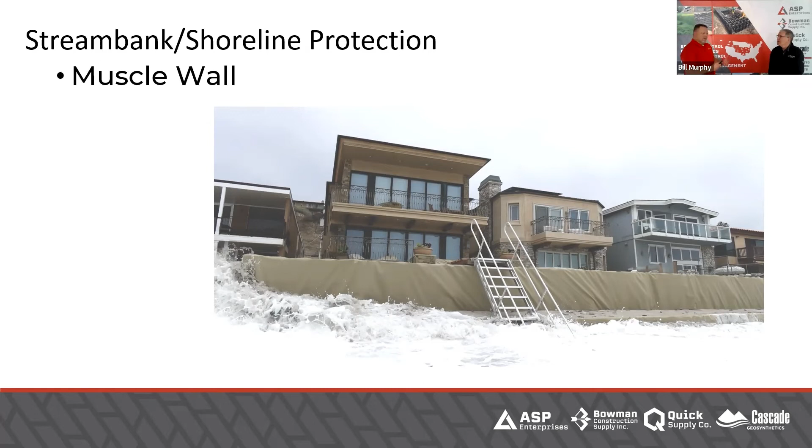If only I had a video to show them, then they'd really see. Gosh, I don't know, where would you see a video? Let's see. Oh, dang, you're supposed to go automatically. There it is. I have the audio turned down.

So this was actually for a bridge. Manitou Springs, Colorado. Yeah, creating a bridge there, but they used Muscle Wall to divert the channel, which worked out really well. You could also, instead of this bridge, be doing both sides of the creek channel. Yeah, doing the same thing. And this is one where it's kind of narrow, so they were able to put.

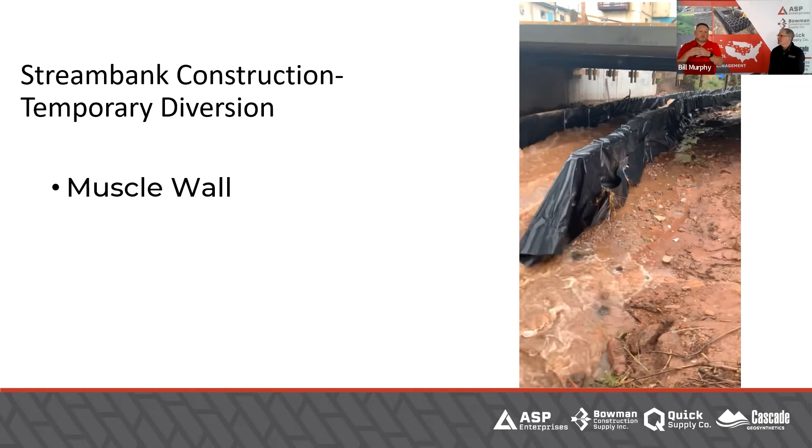And this stayed, it was supposed to be for days. You know, weather made it difficult for the contractor to get in and out of the site, not Muscle Wall's fault, but they ended up staying there for weeks. And then when they were done getting the repair done on the sides and doing the bridge construction, they were able to pull this out and go right back to the natural stream.

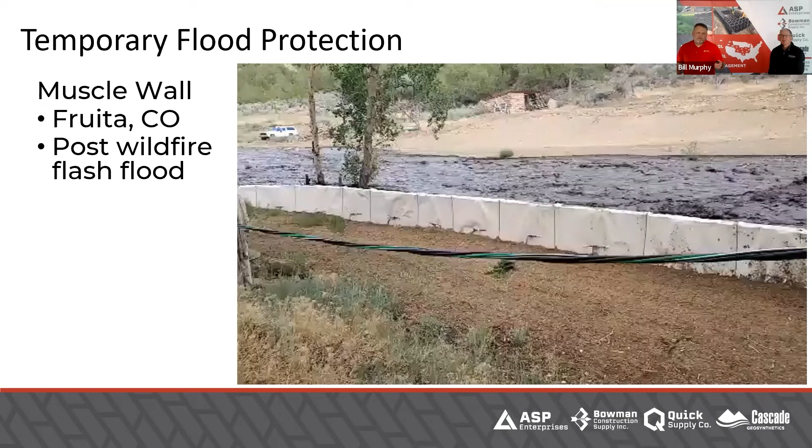I have another video for a different application. This is the one that's post wildfire. Not only flood, but debris comes washing down the mountain. Yeah, the amount of debris coming through is crazy. And this saved a homeowner and their horse barn and their property from getting wiped out from a flash flood coming down off a mountain. I wish I had the audio.

And that's the thing about these western states, you know, they get these rain events that they're not used to having. It takes all kinds of debris with them. And there's a tremendous amount of flow that comes down and impacts this, but Muscle Wall didn't budge. It protected the property very successfully. Here's another one, same property, a little bit further downstream to show how wild this was.

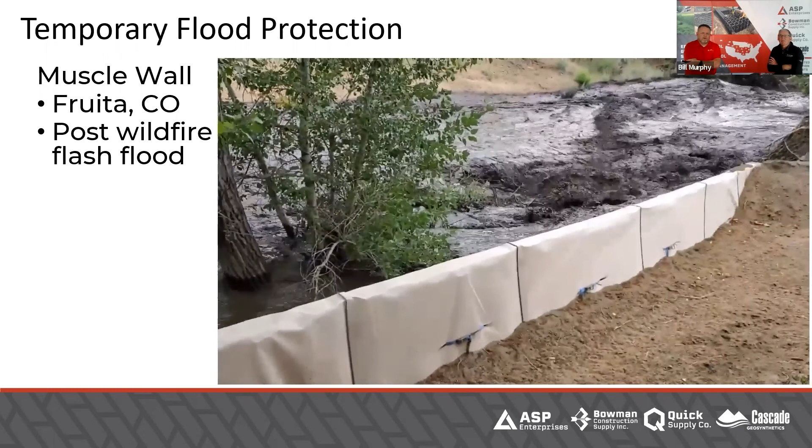Pretty scary for a homeowner, and they need protection. So when we talk streambank stabilization, this system here has some horsepower. No doubt. Composite system.

So, you know, we've kind of talked about that a little bit throughout. One of the reasons that we feel like we bring value to the table is that we don't just have one solution, we have several. And many times what really is the benefit is when you can combine several parts of what we talked about today and put them all in one. And that's what we're going to talk about briefly here.

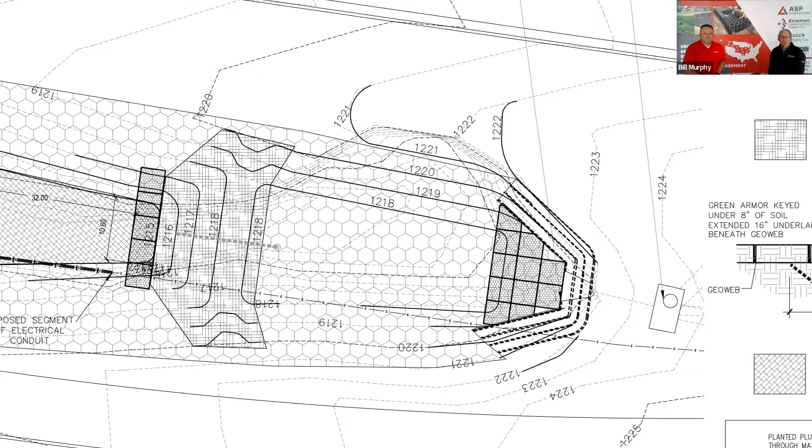This was actually a project, I believe this was in Omaha, where they used coir netting as a reinforced slope, but they also had a scour issue. So what they did is they actually had ShoreMax for the scour protection, had a reinforced slope around the culvert pipe, but then they actually transitioned to, like, GeoWeb over there in the bottom right. It might be, but the other one is the Green Armor system, then was used in the channels going down. So again, that's part of why.

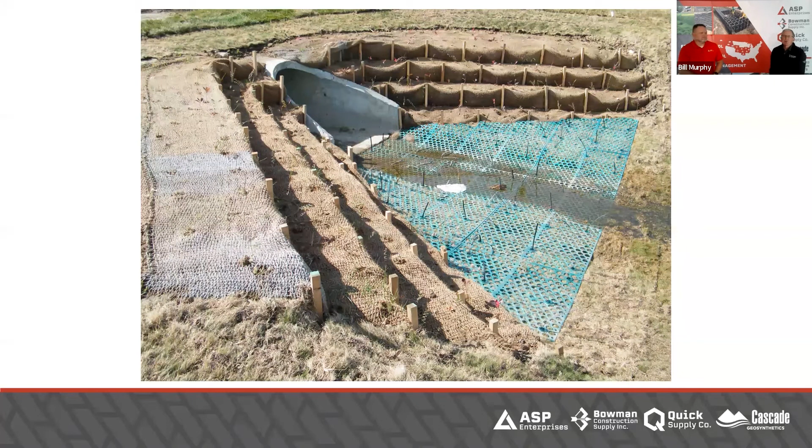Oh, this is GeoWeb. You're right. This is GeoWeb that's wrapped in coir. Wow. And then with ShoreMax. Not wow that I was right, but wow, that's a creative solution. It is. Here's another one.

All right. So we talked about articulated block. This particular one is ArmorLoc. So it's a hand placed block that basically we just filled with gravel. But then we built a reinforced slope above it that was bioengineered. So now they're getting ready for the side slopes. Here you can see they're completed. So those are kind of like burrito wraps. We did have a little form to them to get them to the right height.

Now it's interesting, Bill, I didn't tell you this. The one mistake we made here was every one of these plants died. I'm glad you didn't tell me. I would have told you not to mention it.

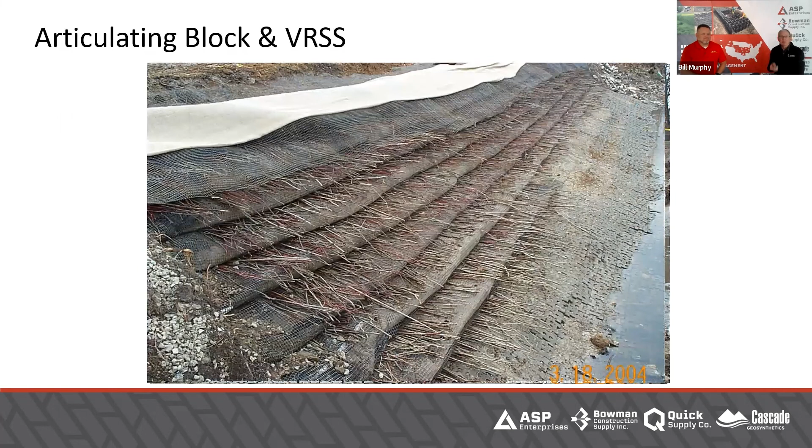The reason being is this grid ruined every one of those live stakes, the cambium layer. It couldn't produce because it was stopping anything from getting through. Cambium layer? The cambium layer of a live stake. So the great news is we just put new live stakes in it. These are the ones that were put in there. You can see some of them are actually trying to live. I love lessons learned. They didn't live very well.

But what we did then is we came back through and put live stakes in, because again, it was just dirt and coir netting with BX1100. We restaked it. And this was, I think, like 3 years later. And so whatever you did the second time worked better with the geogrid. You didn't have that issue that you had with the original. Right. Correct.

What I was going to say is this looks like something Melissa Hurley would like. So being out in Oregon, they really do. I think when people used to say bioengineering, I thought that's not going to work in the Midwest, that's an Oregon thing. Sure. But they really do care about vegetated solutions. But now it's gone all over the country. It's not just Oregon. Oh gosh, yeah. We see bioengineering everywhere.

Yeah. So in talking about that, because we're doing well on time. Doing good. You're using fancy words and I'm talking like I'm from a gravel road in southern Iowa. Because I am.

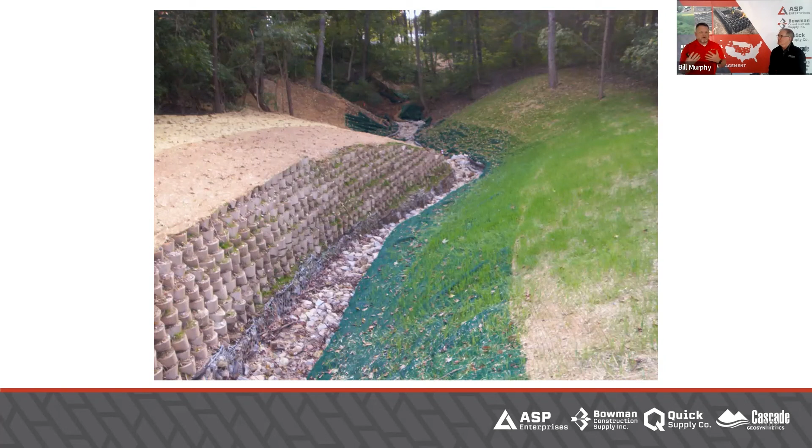You were asking questions. Yeah. So the question was about sustainable sites related to LEED buildings and all that. When that first came out, many of our manufacturers were asked for documentation. Many of them put together a lot of that. We haven't seen it in the last few years because, at least on our end of it, we haven't been as involved in that.

But yes, if specifically when you're asking what type of products you're looking for, we will certainly find that information for you, because there's a lot of it available, whether it's carbon footprint, that's gotten to be a big deal. But then what does it save? You know, like Proganics talks about how many truckloads of topsoil you're saving by using Proganics. And so we can get you a lot of that. Yeah, we have a lot of information.

Mostly those are architects that are doing that. It's usually building related, and they're trying to get a certain rating through LEED. Right. Then they want to include the site and get the points there. I had a couple contractors ask about it last week because they have not seen or heard anything LEED for quite a while, but we're ready to help you with that information.